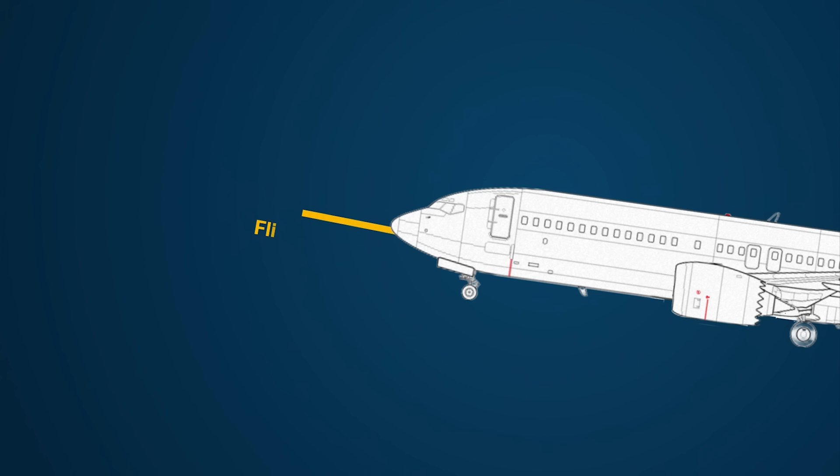Their flagship comeback aircraft, the one that was supposed to prove Boeing could still build planes after the 737 MAX disasters, was experiencing the exact kind of uncommanded control problem that had claimed the lives of 346 people. But it wasn't always like that.

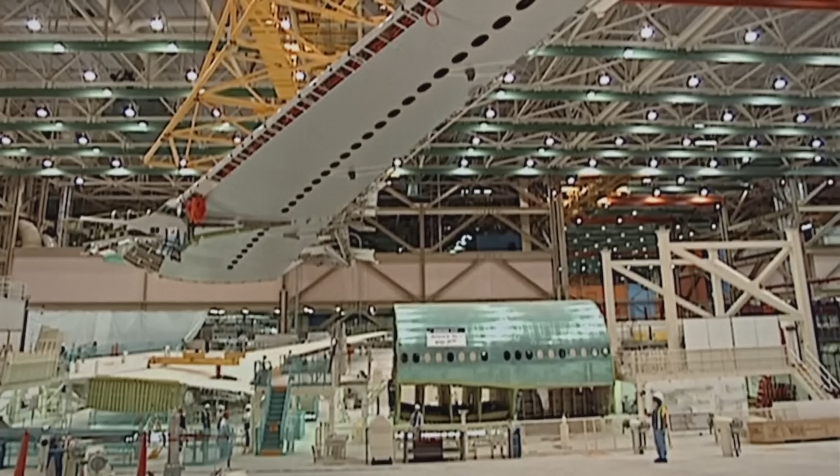You see, when Boeing launched the original 777 in 1990, the company was operating at the peak of its engineering prowess. It took Boeing just 4 years from program launch to first flight, and the 777 entered commercial service barely a year later. By any measure, it was a masterclass in aerospace development. A clean sheet design executed with precision, delivered on schedule, and built to dominate.

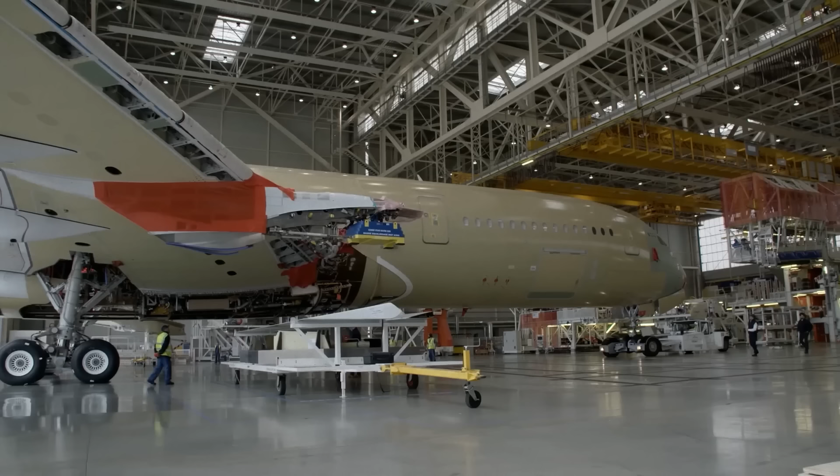But everything changed in 2011 when Airbus upgraded their A350-1000, strategically positioning it as a modern alternative to the 777-300ER, aiming straight at Boeing's most profitable segment. For Boeing, the threat was clear. They needed a response, and quickly.

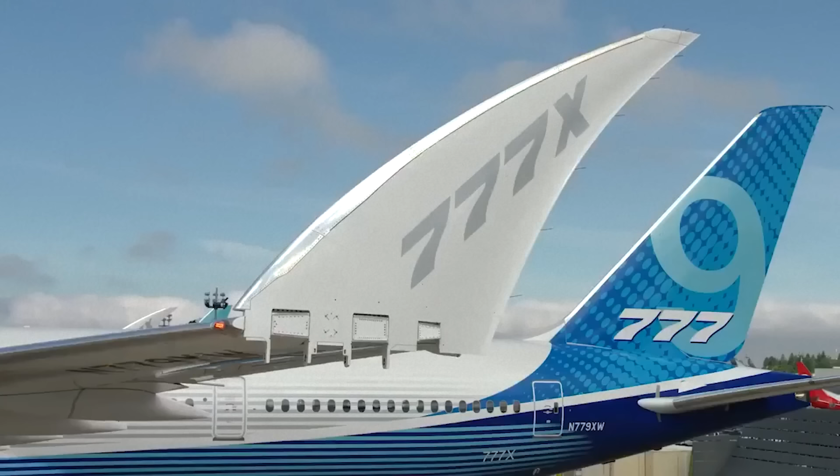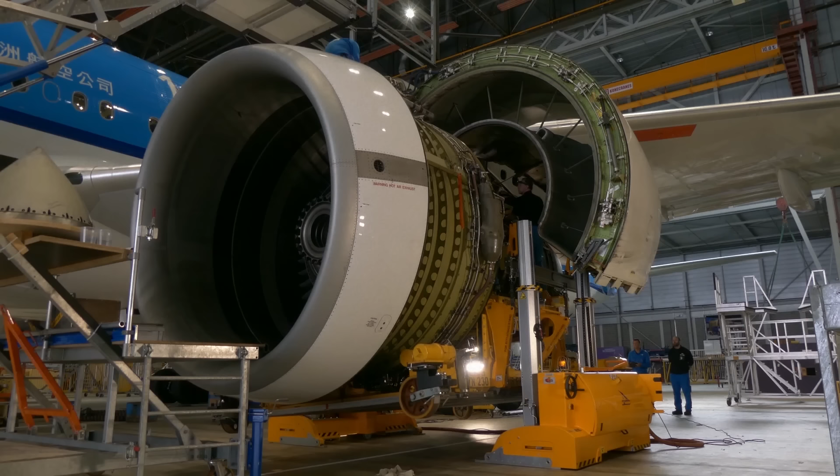So in 2013, just years after this development, Boeing launched the 777X, a highly efficient, massive jet that would make the A350 program obsolete with an entry into service planned for 2020. The plan was straightforward. Use the proven 777 fuselage, add new engines and wings, and dominate the market before Airbus could gain traction. Boeing's engineers were confident. After all, they were simply upgrading an already successful design with new engines and wings. What could possibly go wrong?

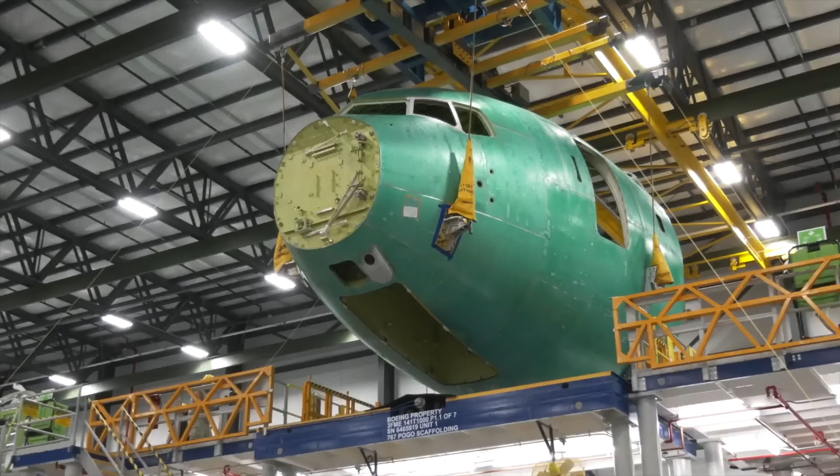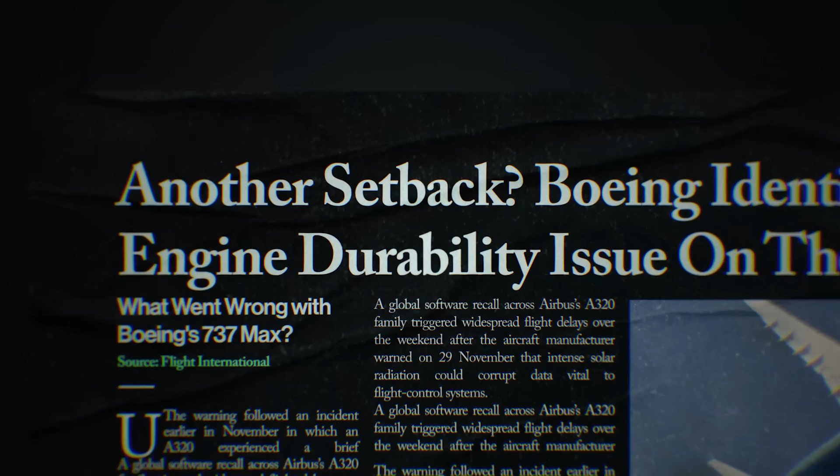Today, more than 13 years later, the 777X still hasn't entered service. Development time has stretched to nearly triple what the original 777 required, and the delays keep mounting. In fact, in January of this year, Boeing discovered yet another problem that could push deliveries into 2028. The program that was supposed to save Boeing's dominance has become an engineering disaster. So what went catastrophically wrong? How did the 777X go from sure bet to one of the most troubled aircraft programs in modern aviation history?

To understand how Boeing's 777X turned into one of aviation's most troubled programs, we must first appreciate the brilliance of what came before it. You see, the late 1980s presented Boeing with an obvious gap in their product lineup. The Boeing 767 could cross the North Atlantic and connect major hubs with smaller cities, but it lacked the range for truly long-haul routes. On the other hand, the mighty 747 could fly anywhere in the world while transporting massive numbers of passengers, but only a few airlines could justify its economics. So airlines wanted something in between, an aircraft with the 747's range, but sized for routes with somewhat less demand.

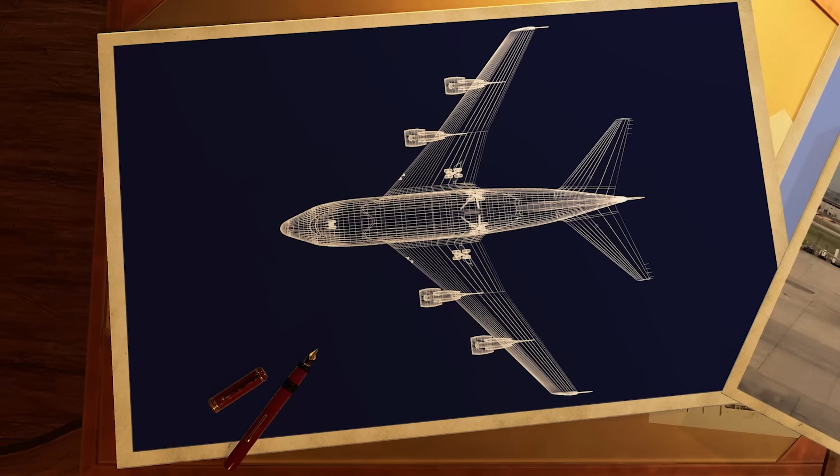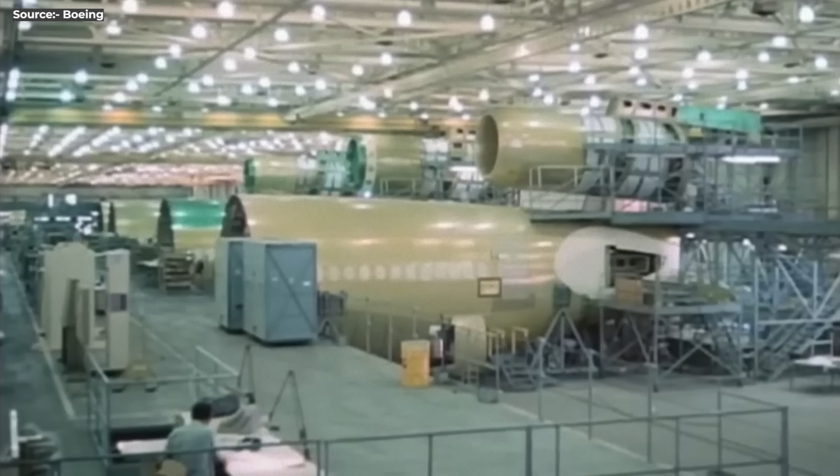Previously, Boeing had attempted to serve this market with the shortened version of its iconic jumbo jet called the 747SP. While this aircraft made sense for certain distant city pairs, its 4-engine configuration meant its economics could never be compelling enough to achieve widespread adoption, selling only 45 units. For a brief period, Boeing even considered giving this new aircraft 3 engines and a layout similar to the McDonnell Douglas DC-10, but that concept was quickly abandoned.

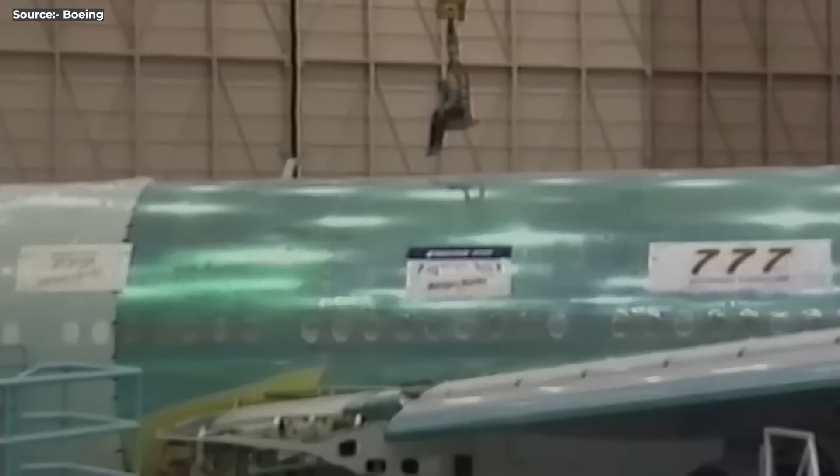Instead, Boeing made a decision that was quite unusual for the time. It invited airline customers directly into the design process from the earliest conceptual stages to provide genuine design input, not market research or focus group feedback, but actual engineering specifications. In fact, it was Cathay Pacific's request that helped push Boeing to increase the fuselage diameter, resulting in a wider cabin, something that would later become a signature feature of the 777. This working together philosophy represented Boeing's collaborative culture at its peak, a stark contrast to the company's approach in more recent decades.

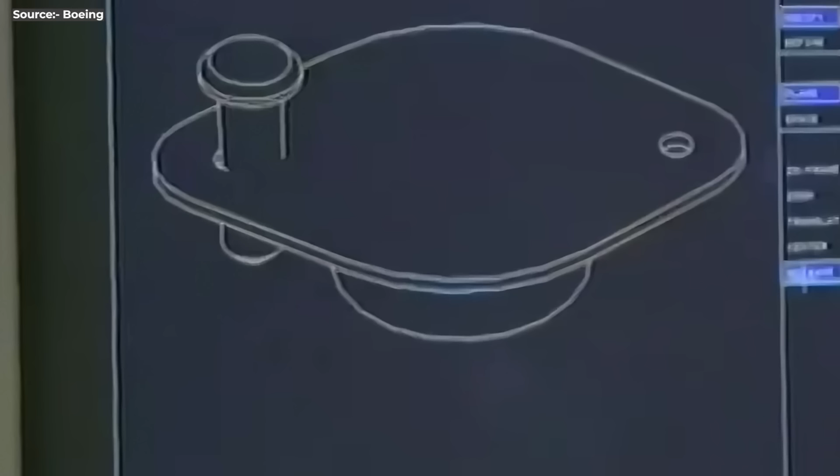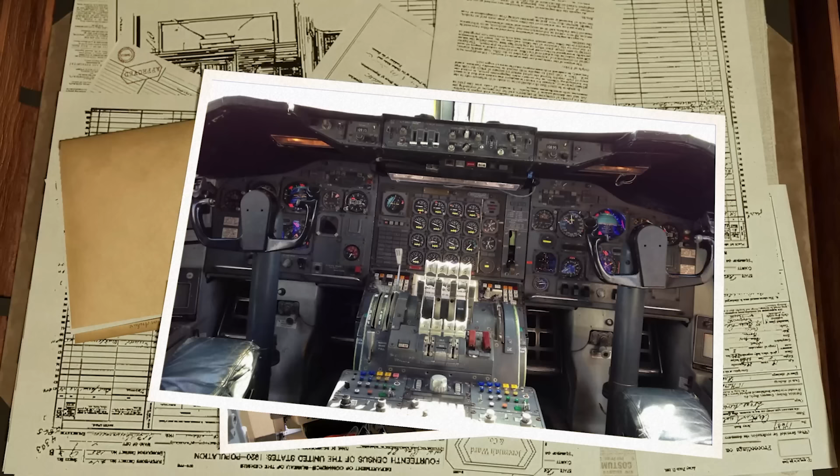Boeing took these requirements and committed to a clean sheet design that would incorporate numerous innovations, and the plane that emerged embodied Boeing's true engineering excellence. The 777 became the first commercial aircraft designed entirely using computer-aided design, eliminating the need for physical mock-ups and dramatically reducing development time. It introduced fly-by-wire controls to Boeing's commercial lineup, replacing mechanical linkages with electronic systems that offered unprecedented precision and flexibility.

Its enormous engines, the most powerful ever fitted to a commercial aircraft at the time, were marvels of engineering in their own right. Moreover, the 777 entered service with a 3-hour ETOPS rating, meaning regulators trusted its reliability enough to allow flights 3 hours from the nearest airport, a testament to both Boeing's engineering and the confidence it inspired. Perhaps most remarkably, from launching the program in 1990 to the delivery of the first production 777-200 in May 1995, Boeing took just over 5 years to achieve this feat, an absolutely unthinkable time frame by today's standards.

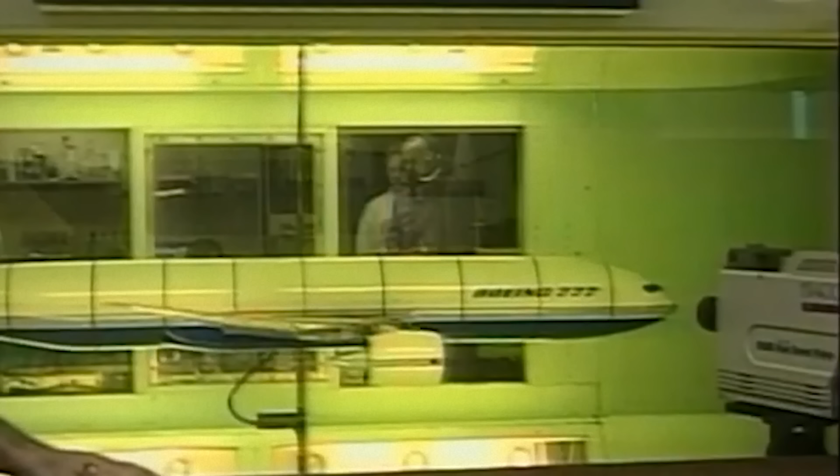Over the following years, the 777 quickly became the new standard for long-haul operations, and Boeing wasted no time expanding the concept into a complete aircraft family with longer fuselages, more powerful engines, and refined aerodynamics. The definitive variant became the

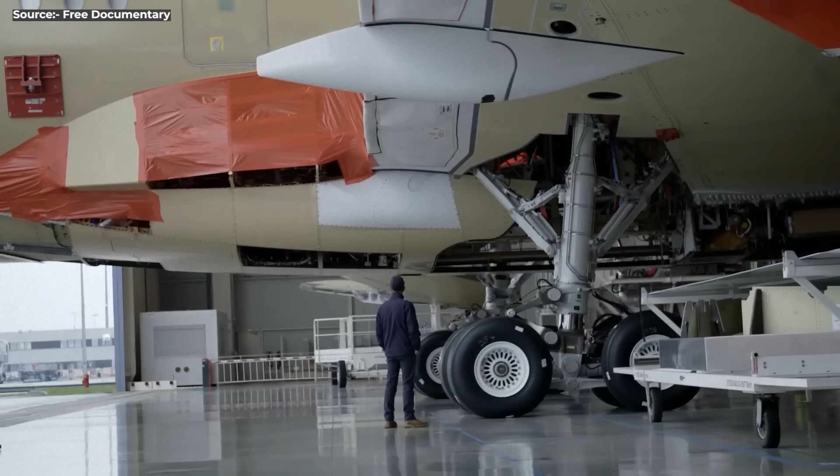777-300ER, capable of carrying between 350 and 400 passengers depending on configuration, while maintaining the range to connect virtually any two cities on Earth. The 300ER became so capable that some airlines began using it to replace their Boeing 747s on routes where passenger demand didn't justify the jumbo jet's full capacity, making it one of the most commercially successful wide-body aircraft ever built. However, this competitive landscape began to shift dramatically when Airbus launched its A350 program in 2006.

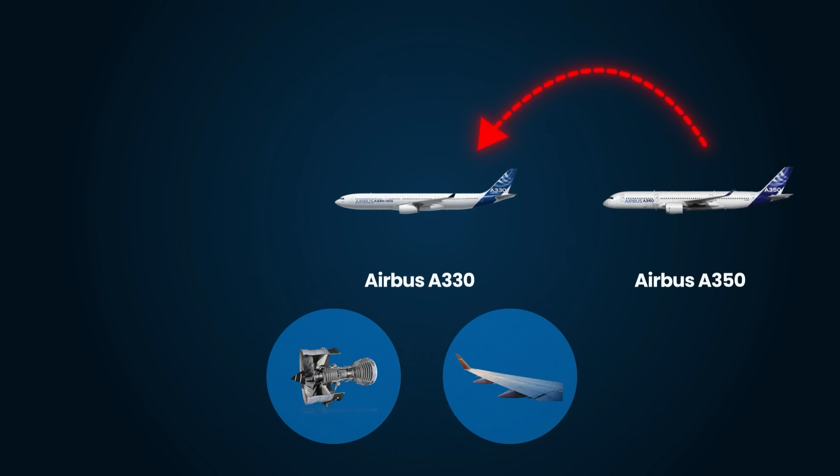Airbus initially wanted to design the A350 as a relatively straightforward update to their aging A330, fitting new engines and a redesigned wing to an existing fuselage. But the A330's basic design dated back to the A300, which had entered service in the 1970s, meaning the fuselage had already been updated once for the A330. And market sentiments revealed that airlines wanted something genuinely new, forcing Airbus to develop an entirely clean sheet design featuring advanced composite construction and cutting-edge systems.

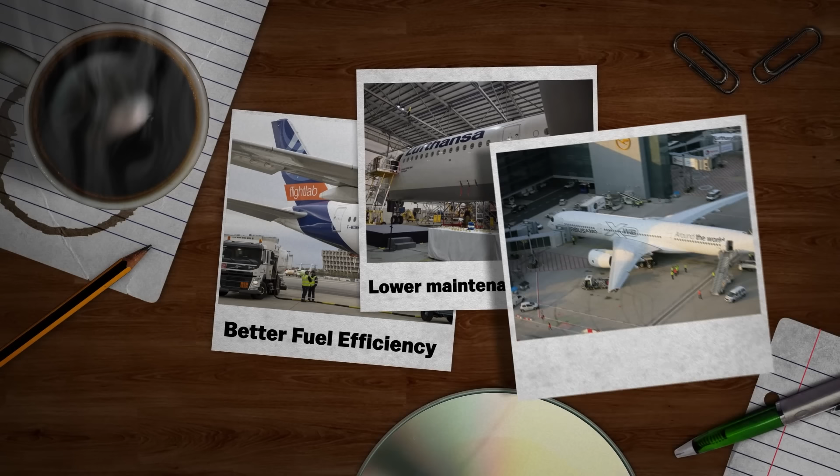While the smaller A350-900 didn't really affect Boeing's 777 sales, the larger A350-1000 posed a direct threat to Boeing's dominance in the long-range wide-body market. Airbus had strategically positioned it as a modern alternative to the 777-300ER, promising better fuel efficiency, lower maintenance costs, and the operational flexibility that came with a newer design. For Boeing, the threat was clear. They needed a response, and quickly. But there was a problem.

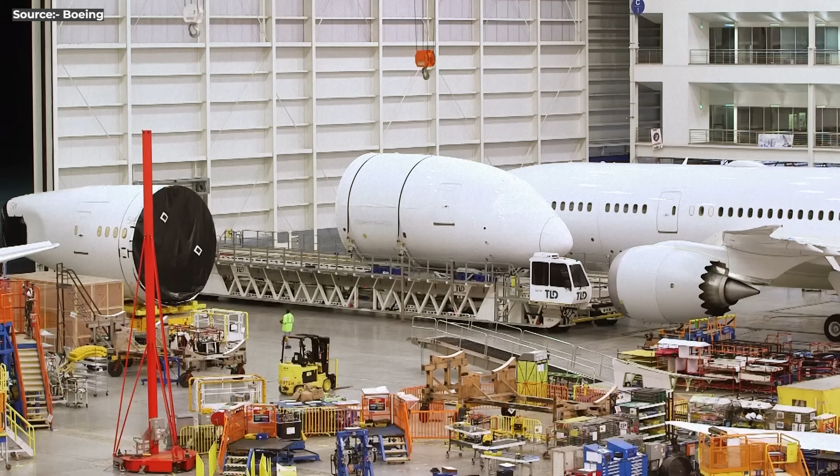You see, the early 2010s was a period when Boeing was going through a lot of chaos across multiple programs. The 737 MAX had just been announced in response to Airbus's A320neo launch. The 787 Dreamliner, which had finally entered service after years of delays, was now experiencing highly publicized problems, including lithium battery fires that would eventually ground the entire fleet. And Boeing was also working on the newer stretched version of the 787, the 10, which strained its engineering resources even further.

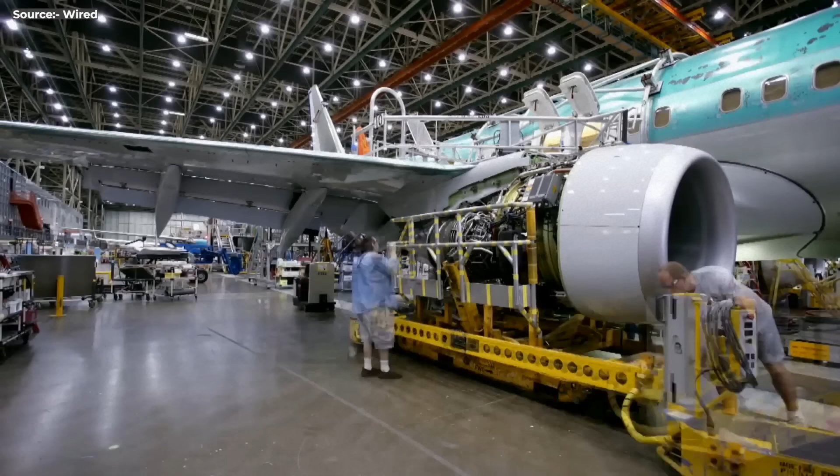So rather than develop an entirely new aircraft, a process that would take years and cost billions, Boeing chose to upgrade the existing 777 with new engines and redesigned wings. In fact, they had no choice. Airbus was planning to deliver the A350-1000 by 2017, and any significant delay in launching a competitive Boeing product would have meant handing Airbus years of unopposed market access. So Boeing immediately pushed forward, officially launching the 777X program in September 2013, with Lufthansa and Emirates as the launch customers.

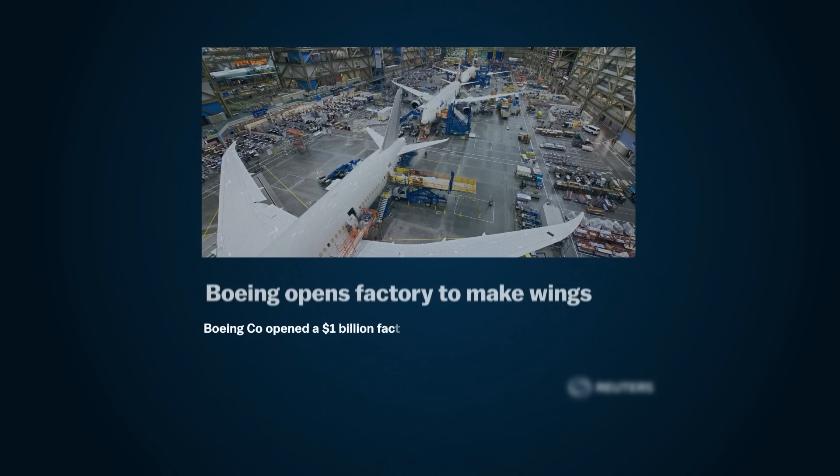The 777X may have been based on the existing 777, but Boeing left no stone unturned to make it future-proof. The 777X's most distinctive feature was its folding wingtips. These folding wingtips weren't merely an engineering curiosity, they were essential to the 777X's commercial viability. Without them, the aircraft's massive wingspan could have pushed it into a larger gate category, limiting airport access and dramatically increasing handling costs for airlines. The engineering challenge was substantial. The folding mechanism needed to be lightweight, reliable, and capable of withstanding the aerodynamic loads experienced during flight. So Boeing constructed an entirely new composite wing manufacturing facility in Everett, Washington to build these revolutionary structures.

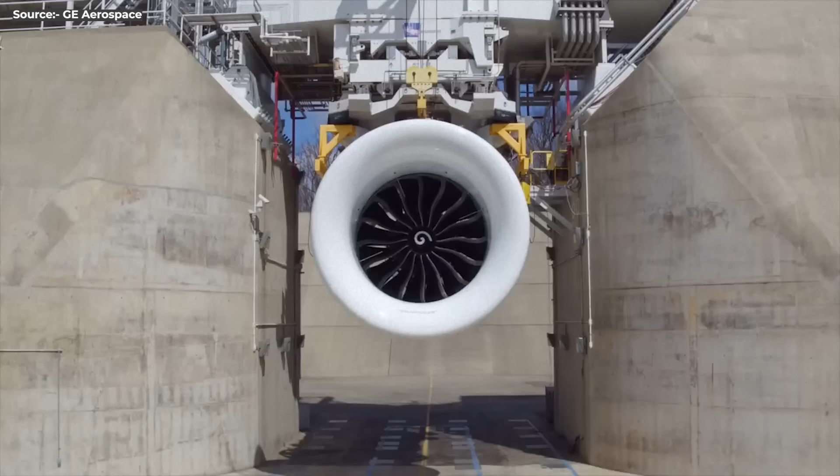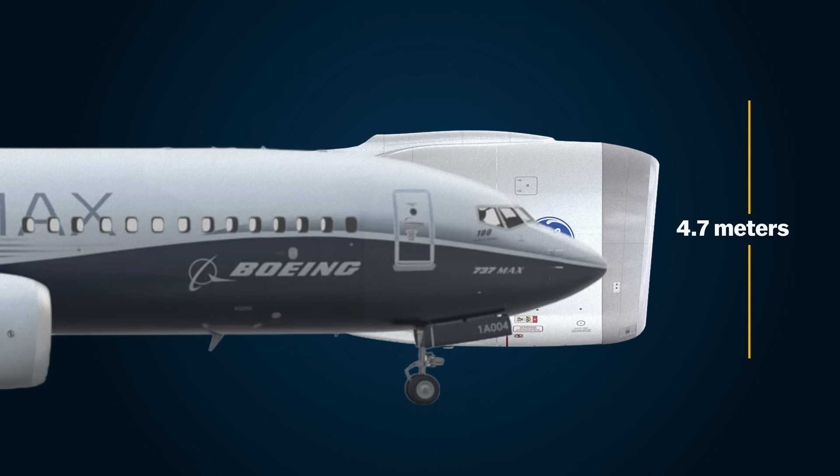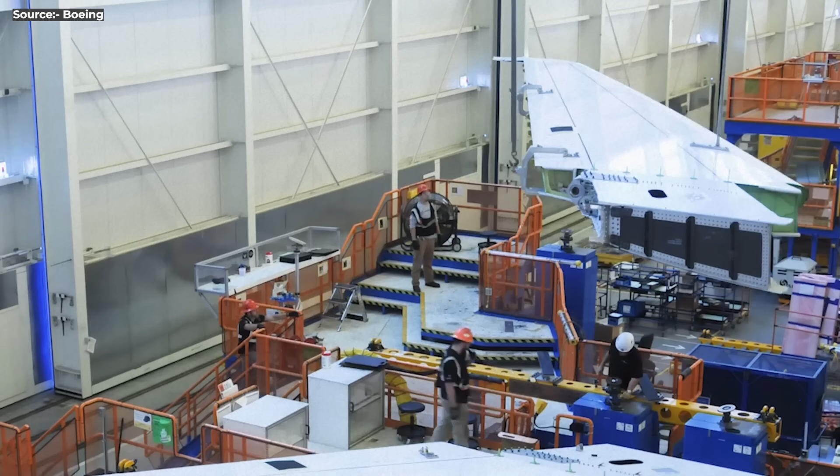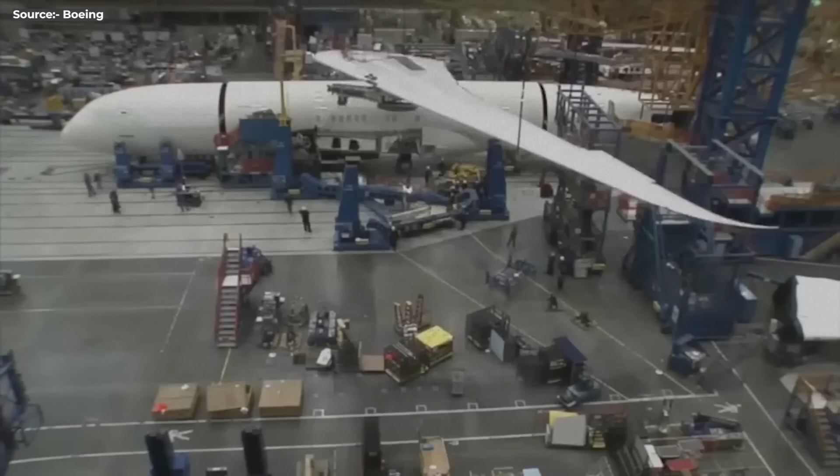Powering the 777X were General Electric GE9X engines, massive turbofans evolved from the GE90 that already powered the 777-300ER. These engines were so large that the cowling diameter exceeded the fuselage width of a 737, with each producing roughly 110,000 pounds of thrust, making them the most powerful commercial turbofans ever built. Boeing assumed this conservative approach to redesign would accelerate development, with entry into service planned for 2020. After all, they'd already developed composite wing technology for the 787 and the fuselage design was proven. But what Boeing didn't fully anticipate was just how many seemingly minor changes would compound into major obstacles.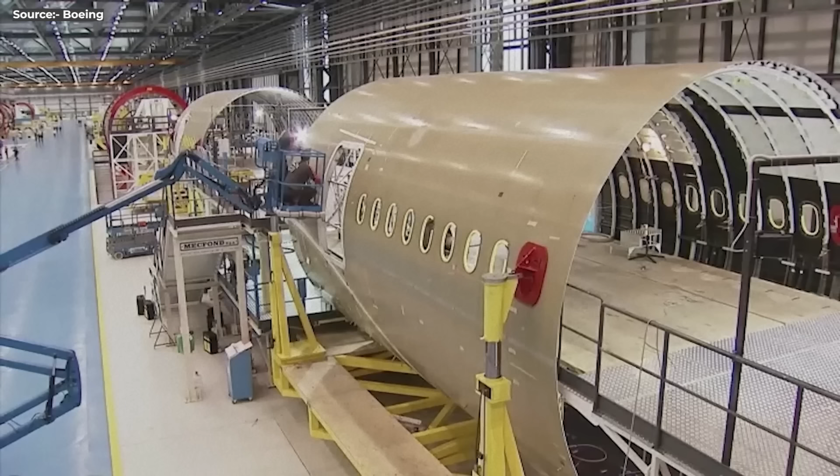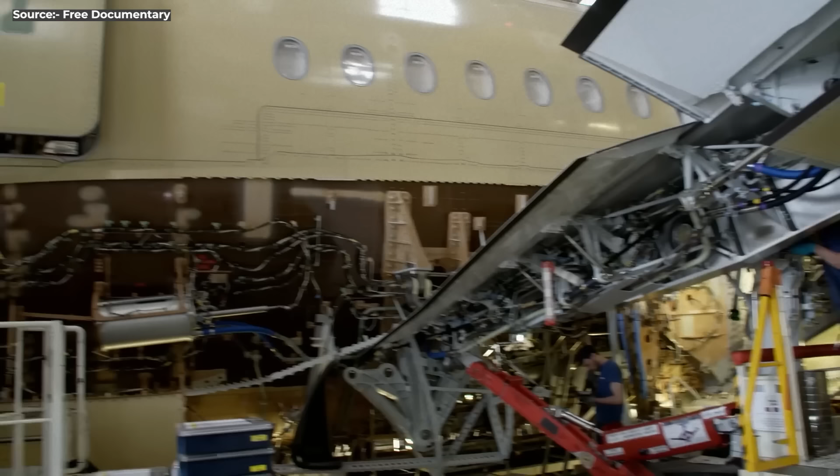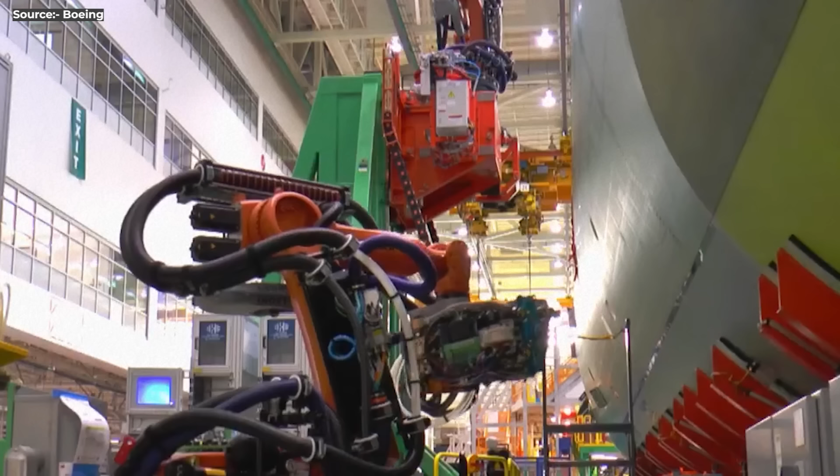The first cracks in Boeing's optimistic schedule appeared early. While the 777X would use an aluminum fuselage similar to the original 777, Boeing decided to construct key sections of the airframe with aluminum-lithium alloy, a newer, lighter material already used in aircraft like the A350. While this change alone would add complexity to the development timeline, Boeing hoped that the weight savings justified the risk. To offset that, Boeing introduced a revolutionary plan that would transform how the fuselage was assembled.

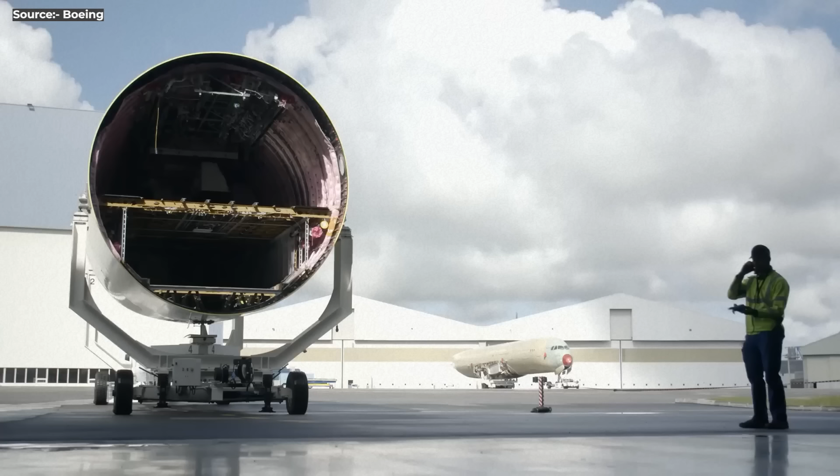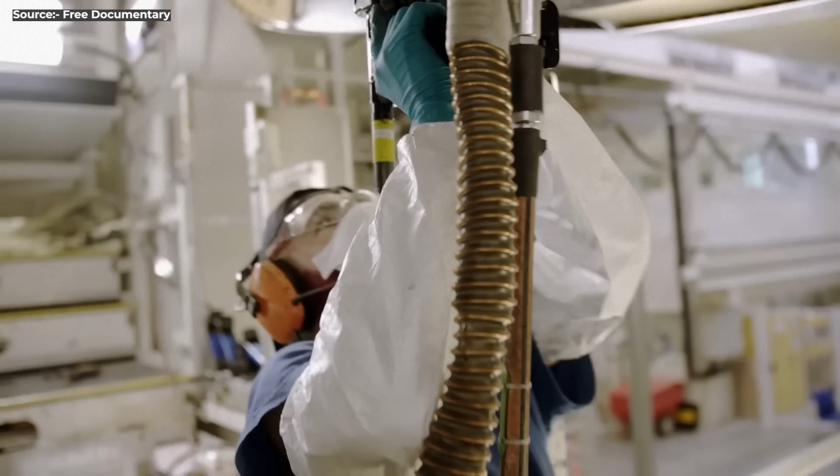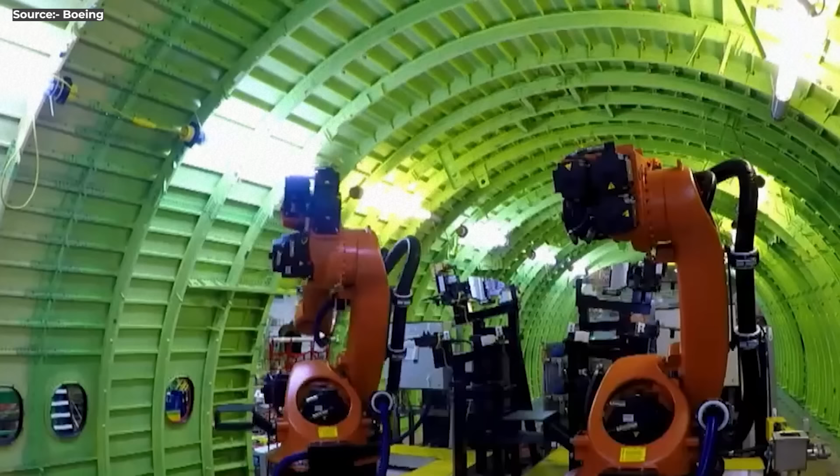You see, traditional aircraft manufacturing is extremely labor-intensive. Each airliner requires millions of fasteners called rivets to join fuselage sections together, and for decades, much of this work was done by hand, one fastener at a time. Boeing decided to revolutionize this process with a system called FAUB, Fuselage Automated Upright Build, where robots would automate the riveting process, theoretically saving enormous amounts of time and money while improving consistency.

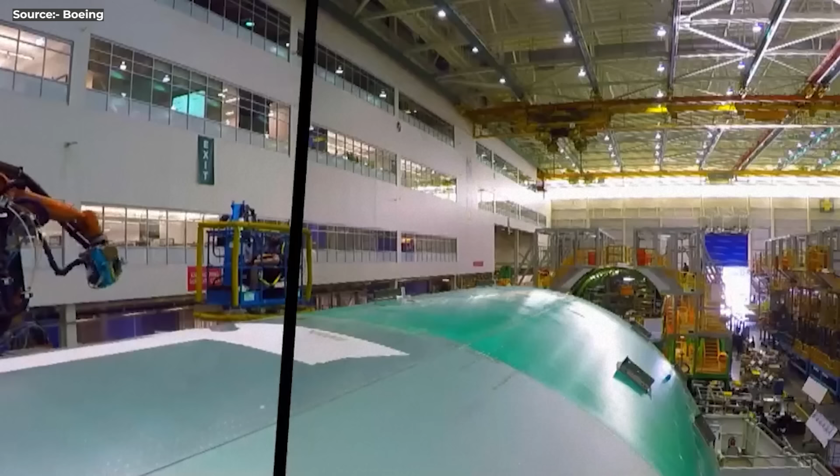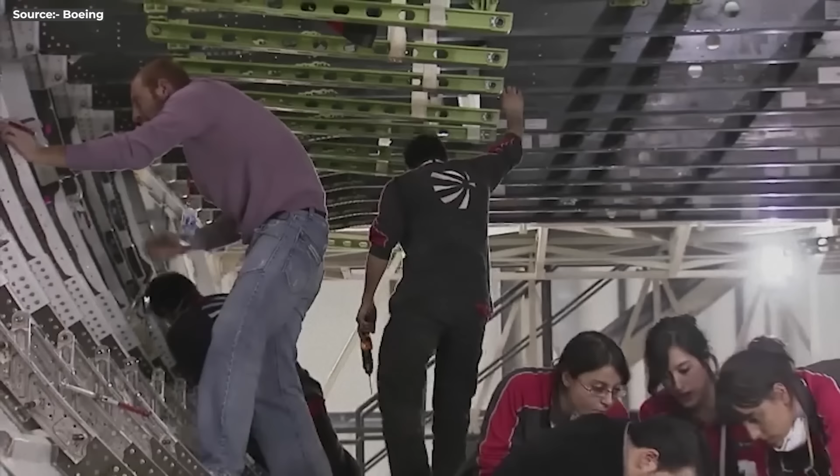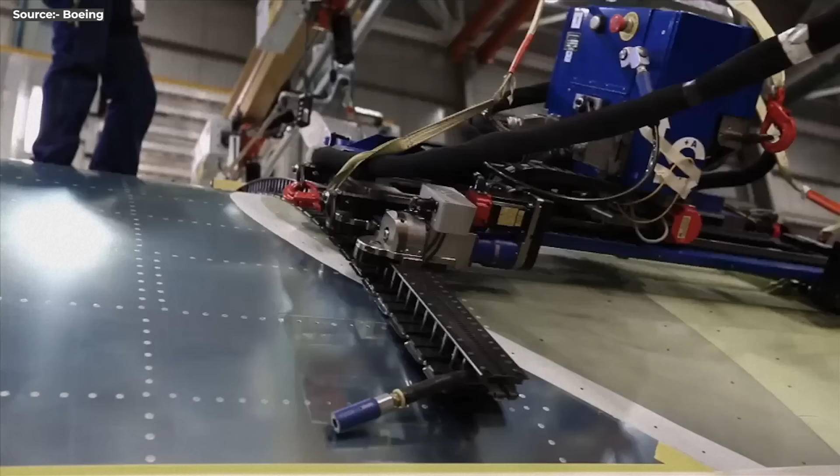But it turned out that the FAUB project didn't meet its bold expectations. Since its inception in 2015, the problems emerged almost immediately. Rather than speeding up production, these automated systems created defects that Boeing's workers, the very people the system was designed to replace, now had to fix manually. Boeing initially dismissed these as teething problems, hoping that the system would improve with refinement and experience. But as months turned to years, the fundamental issues persisted.

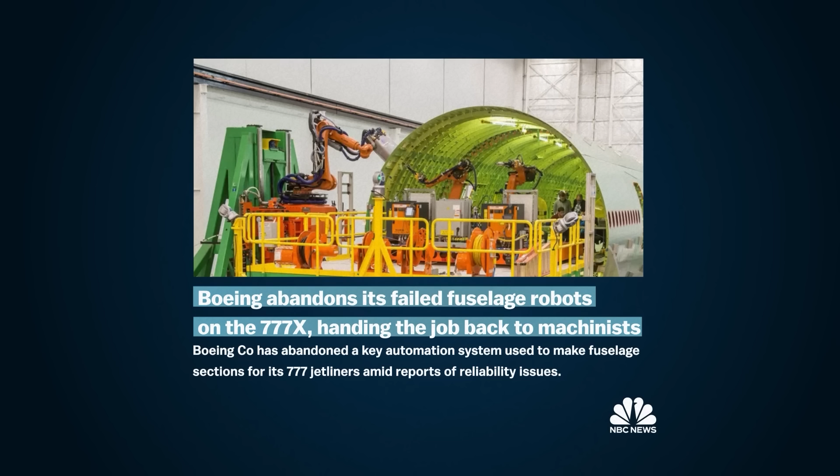In late 2019, Boeing made a humiliating announcement. They were abandoning the FAUB concept entirely. Some automation was eventually introduced for specific tasks, but the grand vision of robot-assembled fuselages had failed, wasting years of development time and substantial investment.

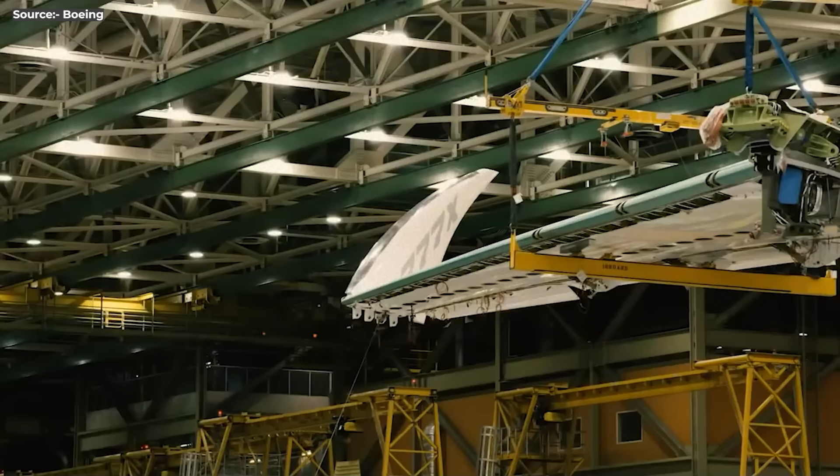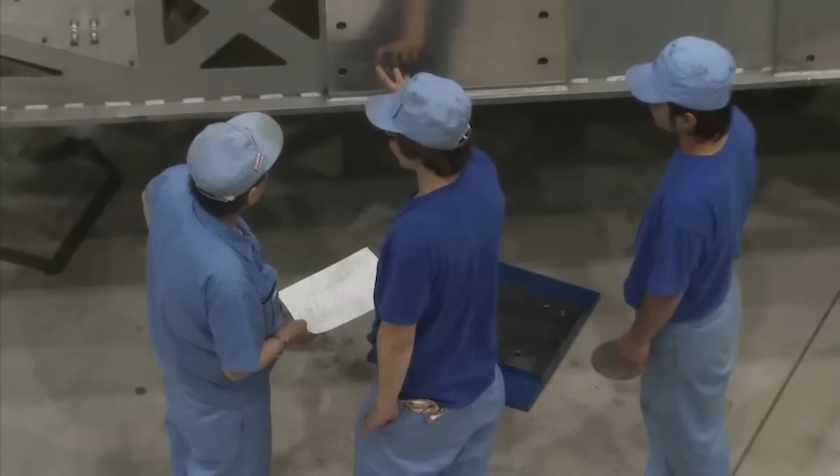While the fuselage automation struggled, Boeing faced even greater challenges with the aircraft's wing. The 777X wing represented one of the most significant departures from the original 777 design. While the design itself was heavily borrowed from the 787, there was one critical difference: its manufacturing location. The 787's composite wings were built by Mitsubishi Heavy Industries in Japan as part of a risk-sharing partnership and shipped to Boeing's facilities for the final assembly.

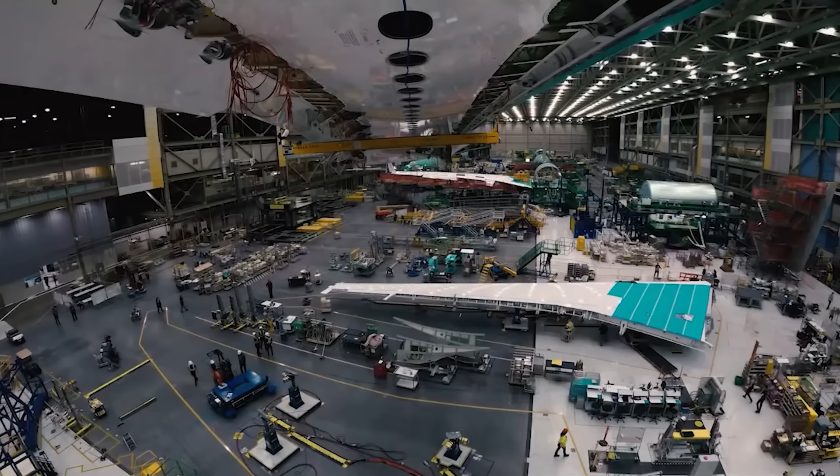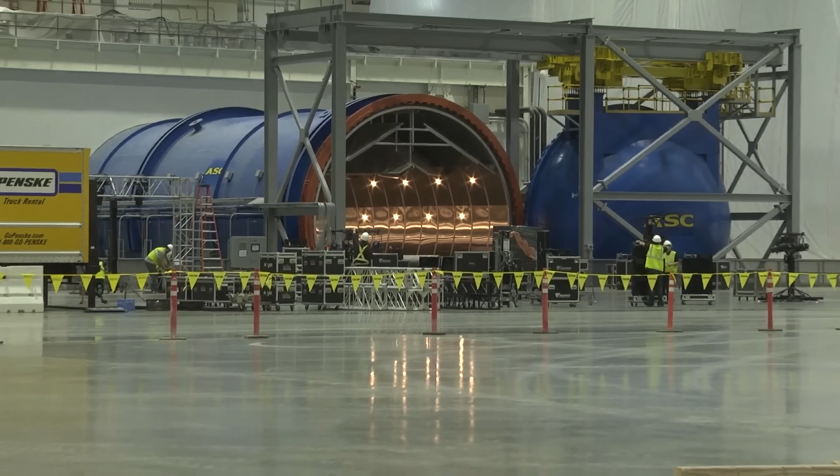However, considering the size of the 777X wings, Boeing decided to build them domestically, constructing a brand new composite wing facility in Everett, Washington. This wasn't a small undertaking. The facility cost Boeing over $1 billion to construct, a massive investment even by Boeing standards. But Boeing deliberately built the factory with significant spare capacity, planning to use it for future aircraft programs, particularly the proposed new mid-market airplane, or NMA, which was later abandoned after the MAX crisis.

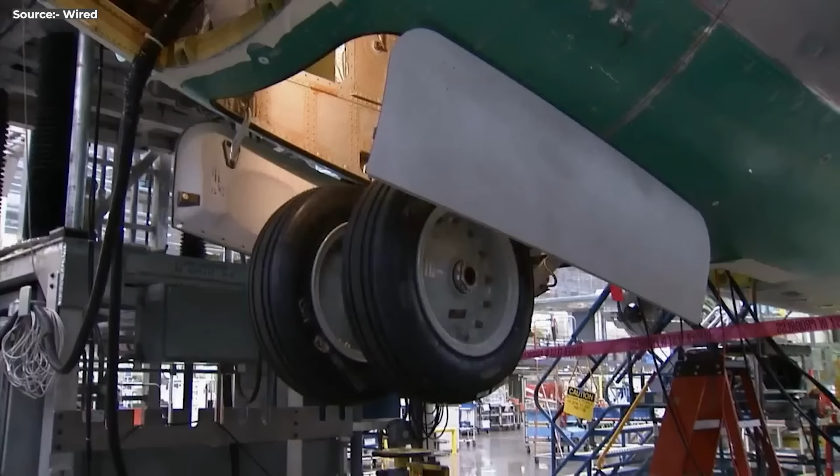Moreover, Boeing and its workforce faced a steep learning curve getting this enormous facility operational, and composite manufacturing at this large scale presented challenges that couldn't be fully anticipated in advance. By the spring of 2019, the program was behind schedule by at least a year, and there were concerns that these issues might worsen, cascading into even longer delays. But those concerns would soon become secondary.

On March 10, 2019, Ethiopian Airlines Flight 302 crashed near Ejere, Ethiopia, just 6 minutes after takeoff from Addis Ababa, claiming the lives of all 157 people on board. This was the second deadly crash involving the brand new 737 MAX in just 5 months. What followed was the worldwide grounding of the MAX fleet while Boeing faced criminal investigations, congressional hearings, and a complete collapse of trust with aviation regulators globally. The company would ultimately pay over $20 billion in compensation, penalties, and lost revenue.

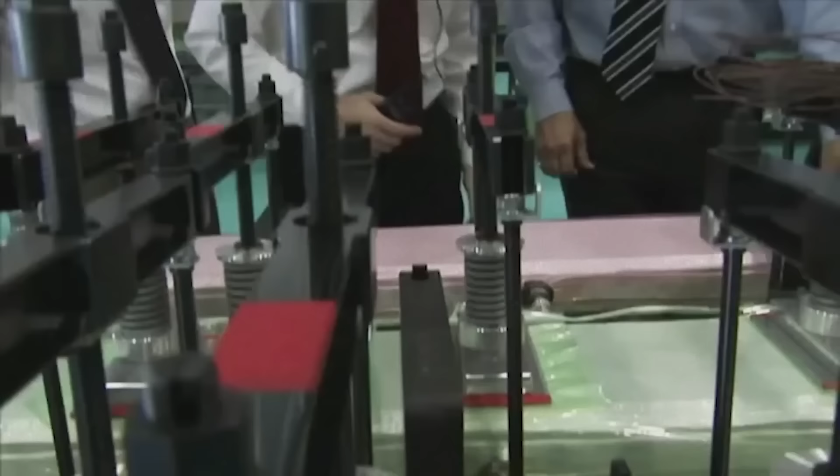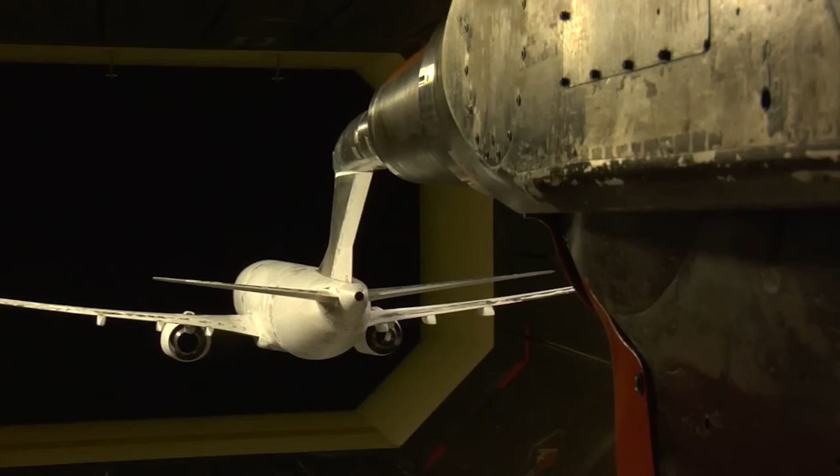But the MAX crashes didn't just destroy Boeing's reputation and finances, they also raised serious questions about the FAA's credibility. You see, until the MAX crashes, the FAA had delegated substantial certification authority to Boeing's own employees. Boeing personnel authorized by the FAA would conduct much of the testing and validation work themselves, allowing them to move quickly through the certification process. This system was built on the trust that Boeing's engineers would verify compliance with safety regulations, but instead, Boeing abused this system to accelerate the certification process.

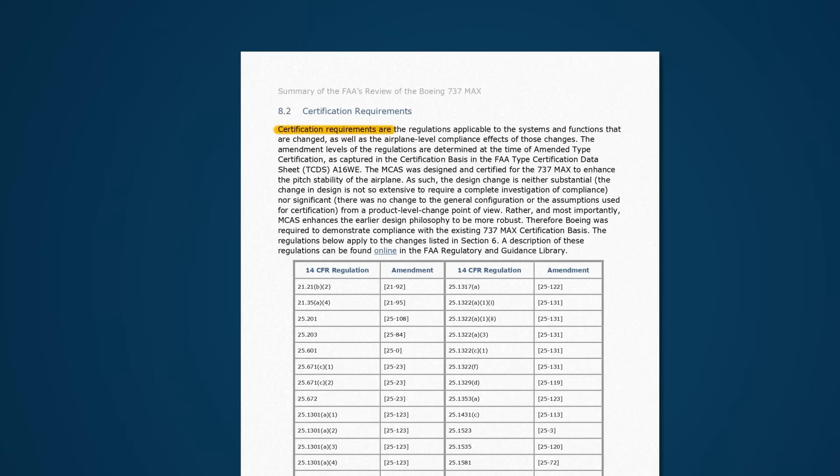Following the MAX crashes, the FAA announced sweeping changes. They would now conduct far more certification work directly rather than delegating to Boeing's own employees. This meant FAA employees now needed to be physically present at Boeing facilities, watching tests, reviewing data, and validating processes. And what followed would prove exactly why this direct oversight mattered.

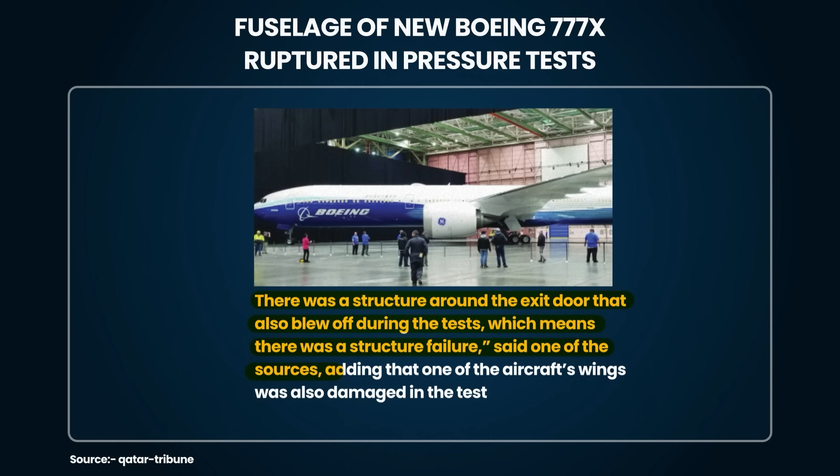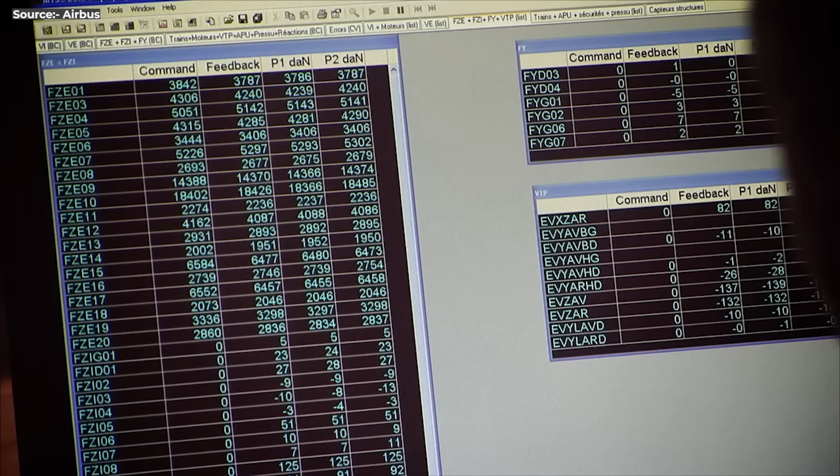In September 2019, a 777X fuselage catastrophically ruptured while undergoing pressurization tests with simulated high-G loads. The pictures of this quickly went viral, and media coverage immediately suggested that Boeing had a fundamental design problem that would require months or years to resolve. While this was bad news for Boeing's already tarnished reputation, the reality was more nuanced. The failure occurred during ultimate load testing at 148% of limit load, just 2% short of the 150% required for testing. While concerning, this represented a marginal structural issue rather than a fundamental design flaw, one that could be addressed with reinforcements. But what happened next would derail the entire program, delaying it by years.

On December 8, 2020, a Boeing 777-9 test aircraft experienced a serious uncommanded pitch event during a test flight, where the nose of the plane pitched up and down abruptly without pilot input. This event, occurring just as Boeing was attempting to regain its footing after the MAX accidents, sent shockwaves through the flight test program and immediately caught the attention of a now hyper-vigilant FAA. The reaction from the FAA was swift and unusually public. In a pointed May 2021 letter, the agency told Boeing that the 777X was simply not yet ready for type inspection authorization, a critical milestone that allows FAA pilots to begin their certification flight testing.

The agency cited the pitch event as a primary concern, stating that Boeing had failed to provide a complete technical explanation for the incident or demonstrate how their fixes would work. Even more damaging, other regulators worldwide, particularly EASA, abandoned their traditional practice of rubber stamping FAA certifications and launched their own independent evaluations. The situation worsened further when Boeing made a strategic decision that would cost the 777X program dearly.

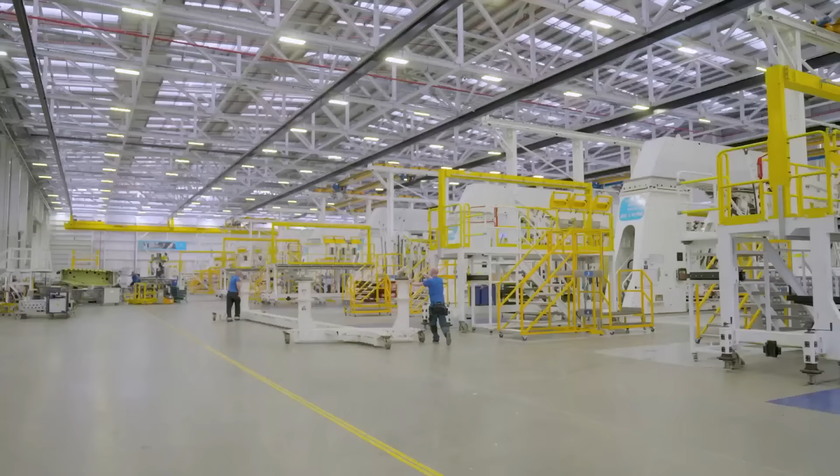With the 737 MAX 7 and MAX 10 still facing their own certification challenges, Boeing's leadership redirected engineering resources away from the 777X to focus on resolving the MAX issues. The 777X program effectively stalled as engineers shifted priorities, losing critical momentum and months of development progress. For an aircraft program already years past its original 2020 entry into service date, this resource diversion pushed certification timelines even further into the future, with no clear end in sight.

Finally, in July 2024, 4 years and 5 months after the first test flight, the FAA granted type inspection authorization for the 777-9. This meant FAA pilots would now begin their own certification flight testing, and if everything proceeded smoothly, Boeing could start deliveries within months, a desperately needed relief for airlines like Emirates, Lufthansa, and Qatar Airways who had bet their future on this aircraft. Throughout July and early August 2024, everything appeared to go well.

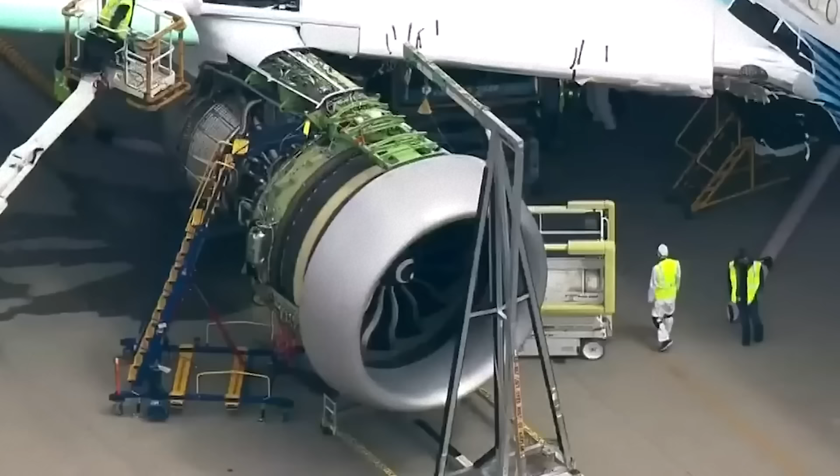The test aircraft flew multiple sorties daily, methodically working through the FAA's checklist, verifying that all new innovations and systems performed as intended. Then, on August 15, 2024, one of the test flights landed at Kona International Airport in Hawaii after 5.5 hours of testing. The aircraft, which was supposed to be delivered to Lufthansa, completed its landing and taxied to the ramp without incident. But when Boeing's ground crew began their post-flight inspection, they discovered something that would immediately halt the entire program again. One of the engine's thrust links had failed.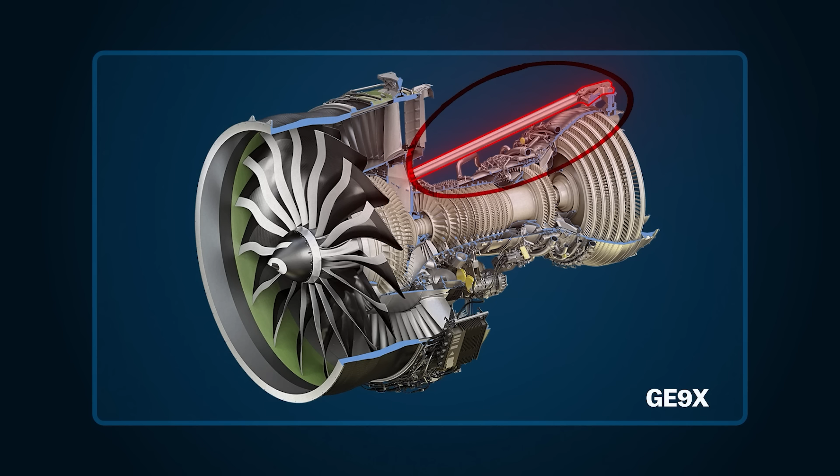To understand why this discovery proved so catastrophic, we need to examine what thrust links actually do. These titanium components form part of the structure connecting each engine to the aircraft's wing pylon. Their purpose is deceptively simple. Transfer the enormous thrust forces generated by the engine to the pylon and through it to the rest of the airframe. But the engineering reality is vastly more complex.

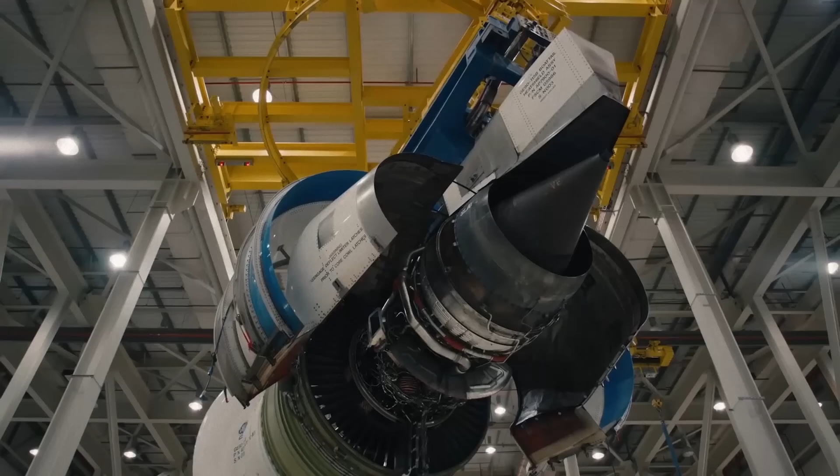Consider the forces involved. Each GE9X engine produces almost 110,000 pounds of thrust at maximum power during takeoff, pulling the aircraft forward. During normal operations, these thrust links carry this load smoothly. But operating conditions on an aircraft are never purely normal. If one engine fails or throttles to idle during takeoff, that engine becomes a massive source of drag, effectively reversing the load on its thrust links. Or even worse, if a bird strike causes a compressor stall, the engine can oscillate between full power and zero thrust multiple times per second while vibrating violently in all directions.

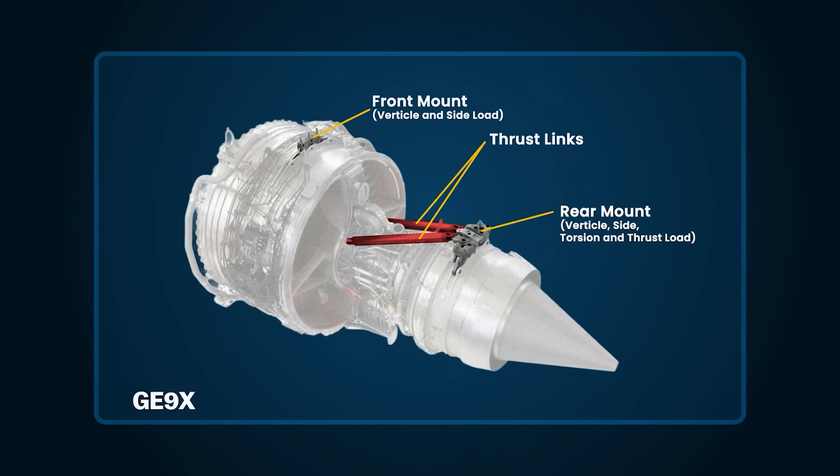In this case, the GE9X featured 2 thrust links per engine, mounted at different angles so that either can independently carry the full thrust load if the other fails. This redundancy proved crucial in Hawaii. When one thrust link failed, the second maintained the engine's attachment to the aircraft. Boeing immediately grounded all 777-9 test aircraft for comprehensive inspections, and what they found shook the entire aviation industry. Additional cracks in thrust links across the entire fleet.

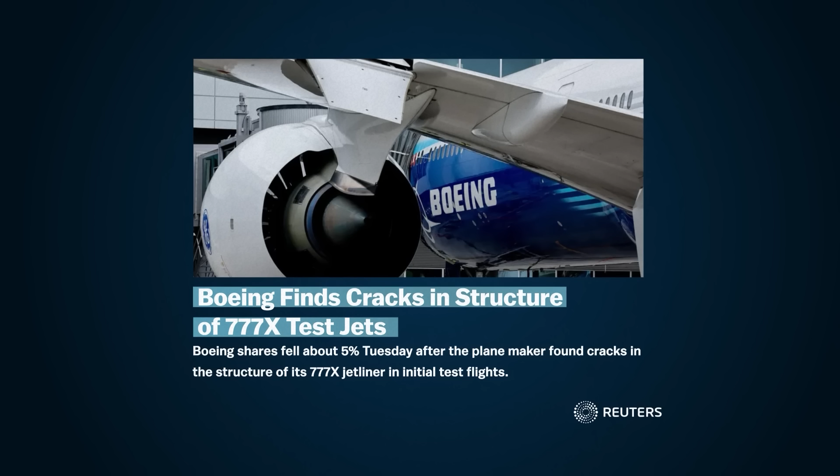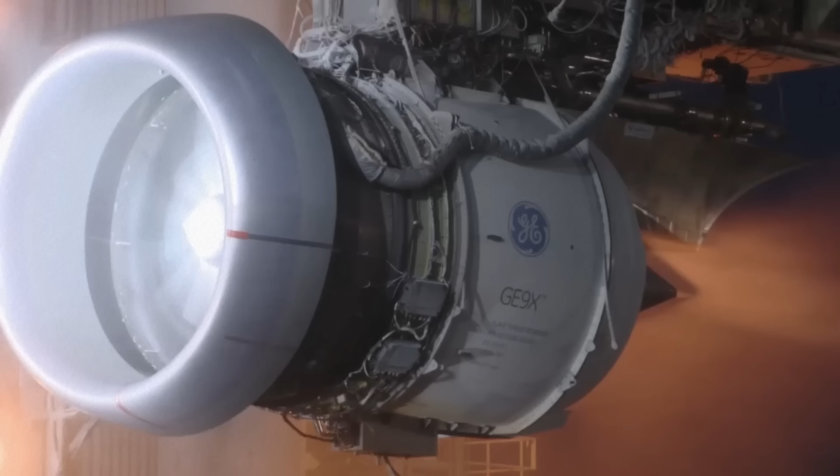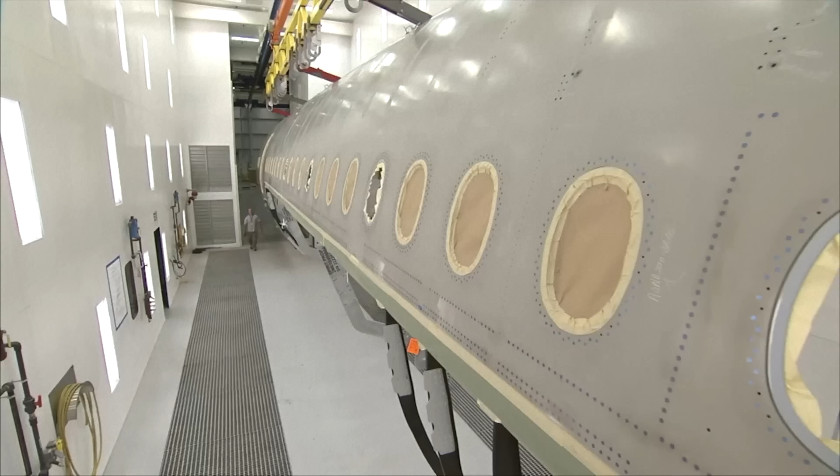While the exact number remains undisclosed, the pattern was clear. This wasn't an isolated manufacturing defect or a single flawed component. The problem was systemic, and more critically, even though General Electric manufactures the engines, Boeing designed the thrust link structure, meaning this failure falls squarely on Boeing's engineering. Boeing eventually resolved the thrust link issue through redesigned components and a better inspection approach.

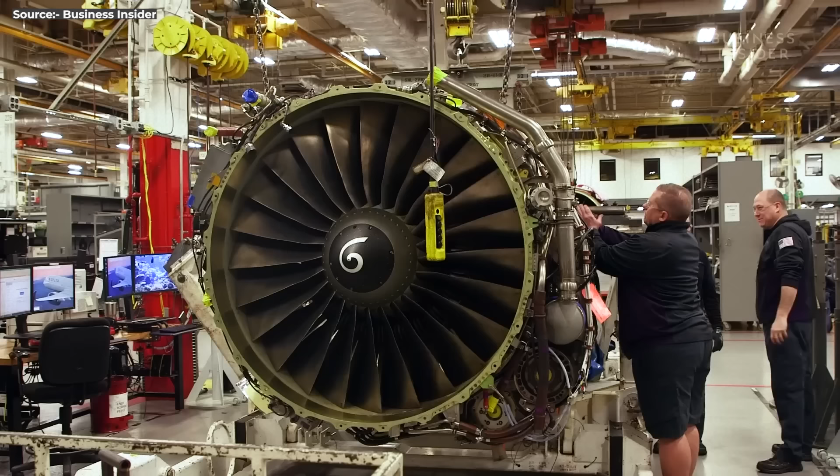But in late January 2026, Boeing and General Electric discovered a new durability issue affecting the GE9X engine during routine inspections. Boeing has yet to disclose the full extent of the problem, but it is said that they are working with General Electric to resolve it. The 777-9, which was initially meant to enter service in 2020, continues to struggle, and while the first delivery has now been pushed back to mid-2027, even that date remains uncertain.

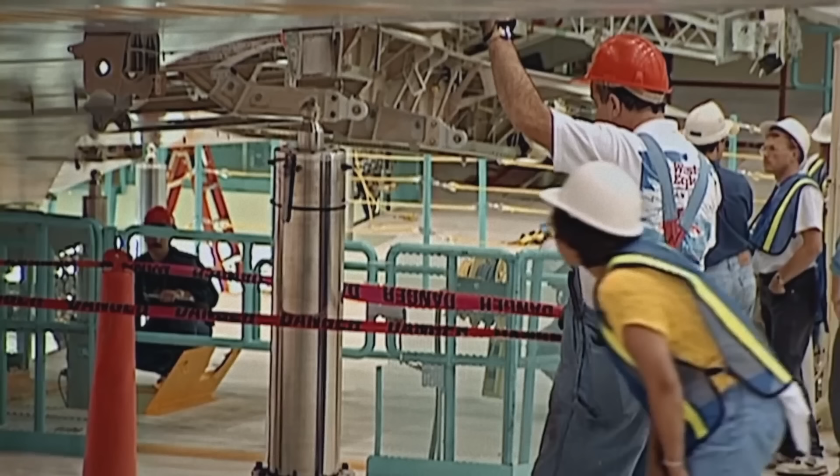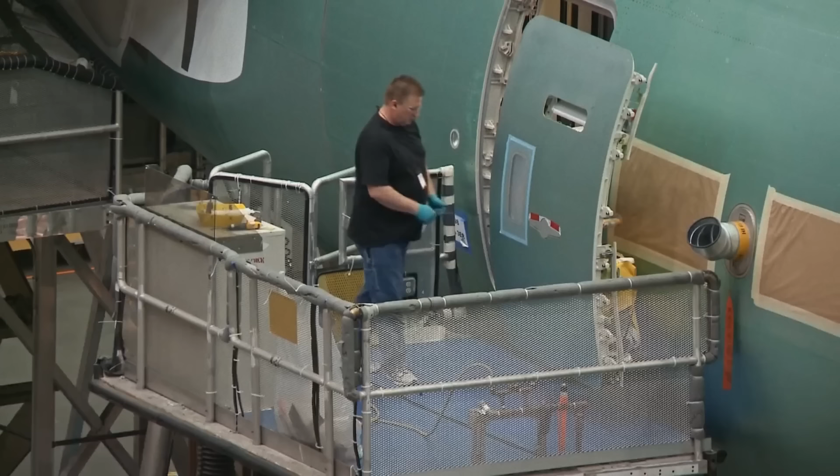For Boeing, the 777X represents the ultimate irony. Where the original 777 took just 5 years from launch to delivery through engineering brilliance and collaborative culture, the 777X has already consumed 13 years and billions of dollars with no end in sight. The program hasn't just destroyed shareholder value and airline confidence, it's demonstrated that Boeing has completely lost the engineering excellence that made the original 777 possible. What was meant to be a straightforward upgrade has instead become a monument to Boeing's decline. Proof that the company that once redefined aviation excellence can no longer even upgrade its own masterpiece.